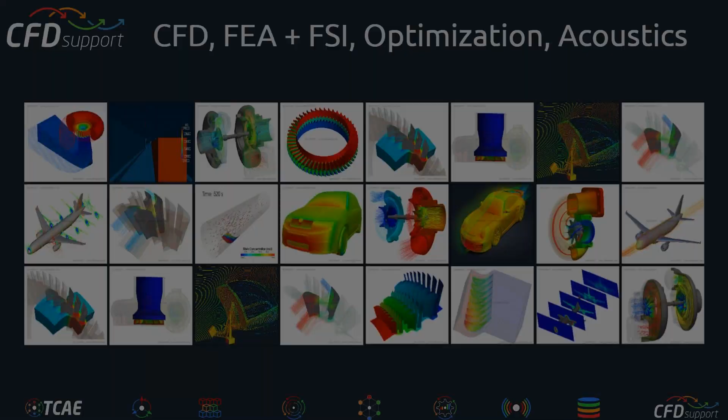So the software consists of several software modules. It's extremely flexible because it's been created from the beginning in a way to fit existing workflows or create new workflows from scratch. So every engineer from the industry can find their workflow. And so the workflow can be created. It's extremely flexible, and it can work.

Our software works with open source codes, with in-house codes, with other commercial codes, with everything that's available, because it's extremely flexible. From the beginning, we created it in this way.

That's one point. It has completely unlimited way of usage, so there are no limitations on number of users, job cores, or hardware installations, so you can be sure you can use your resources to the fullest. And there is definitely a really wide range of licensing and collaboration options. So in these terms, it's very, very efficient.

It's based on open source. This is really a big thing. We are a relatively small company, and we have acquired the ability to make the open source packages work together, to connect together, to create a comprehensive simulation environment. This is really important. So it works on OpenFOAM, ParaView, Calculix, NetGen, OpenVSP, and in fact, there's more than 60 open source projects connected together to create this software.

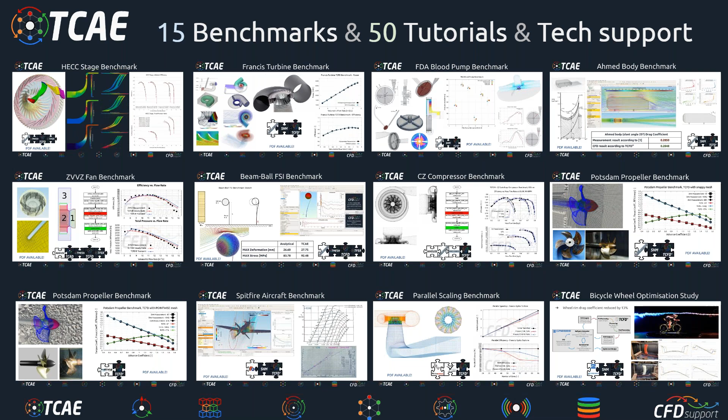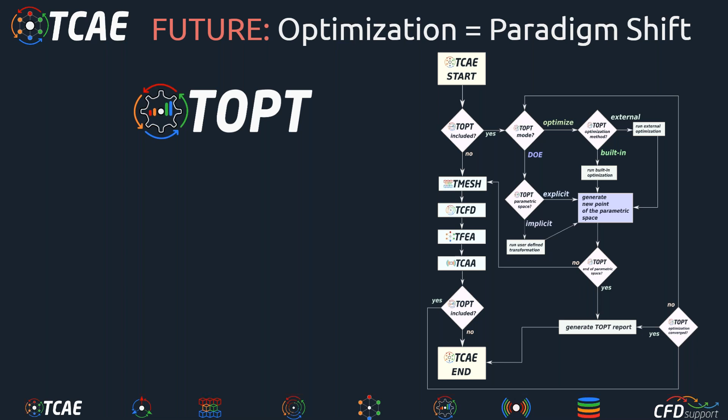Okay, so we have a couple of big projects for the future. We will definitely keep continuing development of the optimization module, which is called TOPT.

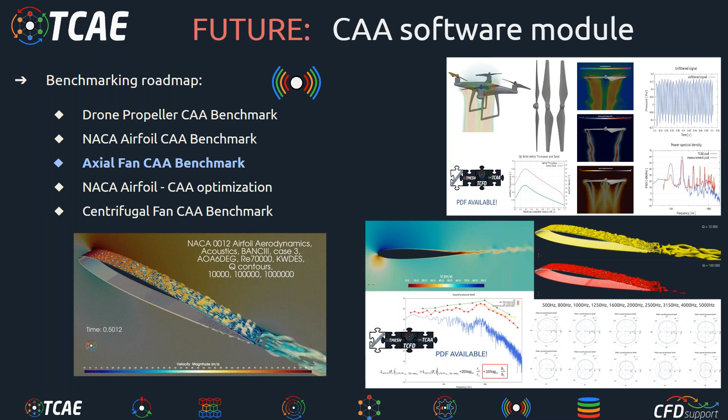So we will keep pushing TOPT. We have the acoustics module, which we believe is very unique, and it will be developed for the future for sure. We are also working on a new module called T-Base, which will allow users to save data for the future in special databases, because we believe data is the future because of machine learning, etc. T-Base will allow its users to create their own surrogate models, so to get simulation results in seconds because of prediction from a trained AI model. That's what we believe in, and we are moving here very quickly.

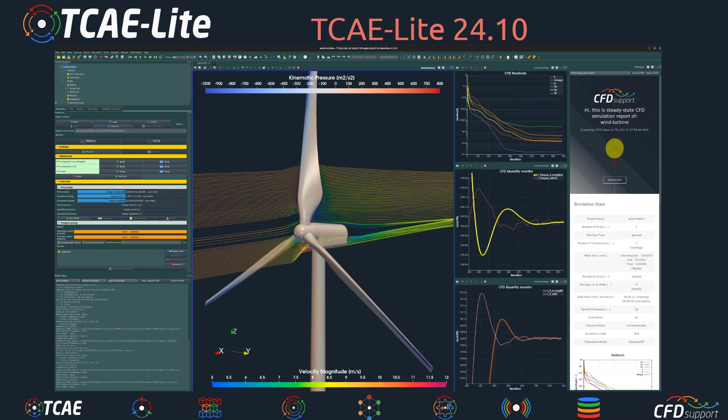Recently we released our latest version, 24.10, so there's a very new version out there, and we also have a light version for those with a limited budget. Today's webinar isn't exactly about this, but TCAE also has its light version, which is as cheap as a daily cup of coffee, so anyone who means it seriously with simulations can afford it.

That's TCAE Lite, and I'll kick off today's topic.

So when we talk about wind turbines, we mean horizontal axis wind turbines, because those are the really huge machines which are in quite a big trend in the recent period, because the energy harvested with wind turbines is renewable, considered green and very popular. It's trending, and the market is growing, and the need for simulation is growing very quickly, and that's why we're bringing this webinar. We are already helping several clients with wind turbines, and that's why today's webinar is here.

So we are talking about specific machines here, because they're huge, they are very large. You can imagine that nowadays the largest wind turbines are as large as the Eiffel Tower, really 300 meters high, with more than 100 meters long blades. I'm talking about offshore wind turbines. As you can imagine, the power grows with the size of the wind turbine, and the efficiency also grows with the height and size of the wind turbine. The disc covered by the blades is extremely important, the area is extremely important, and it can harvest more energy with bigger discs, and also offshore, where you can find much better conditions in terms of energy to get.

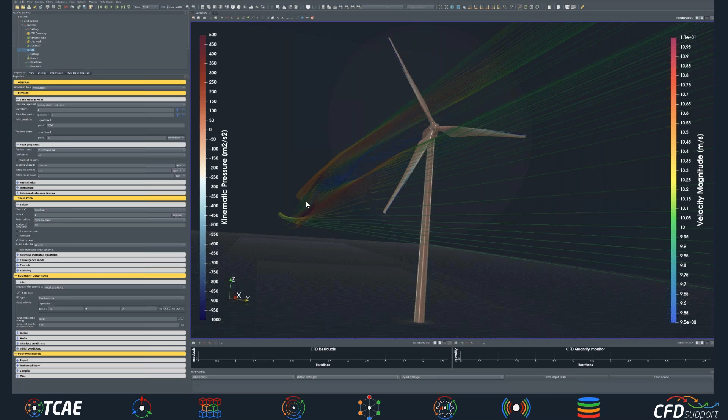So let's go to it. Here he comes, the one who comes after me. I'm not worthy to untie his sandals. And it's Radek. Yes, it's Radek. Let me take a look. Yeah, I'm switching over to him. The presentation has been switched. Yes, Radek, can you hear us? Perfect, can you see us? We can see, I hope you can see me now, and the stage is yours.

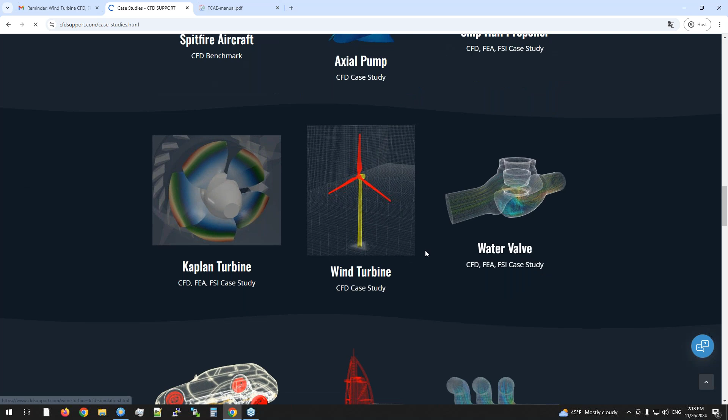Thank you, Luboš. I hope you can see my screen. I will show you an example of simulating a wind turbine in our software. First of all, as usual, I will start on our web pages. If you go to our web pages and visit the case study section, you will find examples to play with TCAE, and one of these examples is our today's topic, the wind turbine case. You can go here, download the case, and read some details about the case setup, the simulation, and the possible outputs.

Later on I will show you how this case is set up. Typically, I think it's not a typical CFD project case, because we usually focus on a single blade simulation, to follow all the necessary parameters with respect to good simulation results, like the boundary layer, mesh refinement, etc. So we typically focus on a single blade or just a section of the blade to improve it or to deeply analyze the properties at certain conditions. So this case is more or less a marketing case, and it shows the general abilities of our software to simulate such complex applications.

So today I'll show how to set up this kind of case, external aerodynamics of the whole wind turbine geometry, both with steady state and transient solver or transient simulation. So let's go for it.

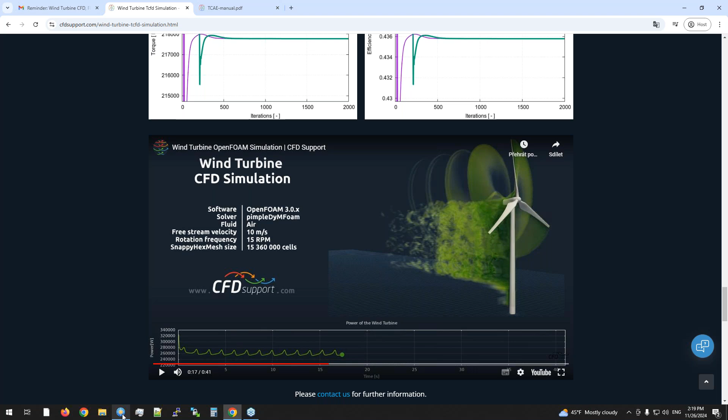So let me go to my computer, and I will run TCAE, the latest version, which was released almost a month ago. Time goes so fast. And I will take directly the case.

Let me create a new case here. You can create a new case when starting from the very beginning, but here I will use 'create from other projects,' so I will copy the setup of the project, which you can download directly on our web pages. Now I need to find it. I hope I placed it here, today's date, this wind turbine case.

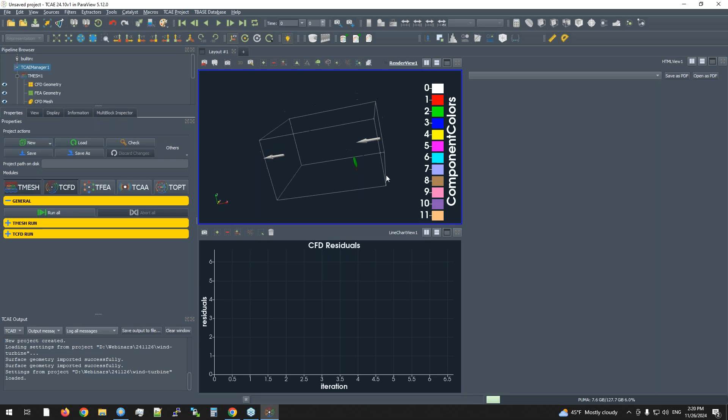So now I am creating a new project, and the data, the setup, is copied from the existing project because I had run it before our webinar started to have simulation data. Now I'm just creating a new project with the setup.

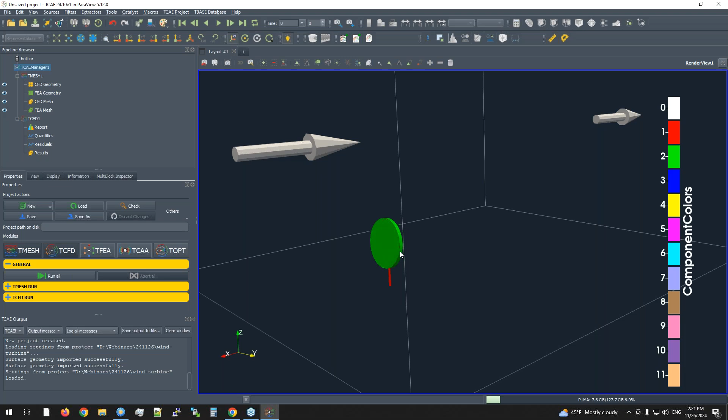As you can see, standard layout, and the geometry looks like this. We have the external geometry, using here the bounding box, and here we have our lollipop, which looks like a lollipop - that's the wind turbine - covered or surrounded by the interface, which defines the rotating region. So here we will have two regions: one rotating, and the rest, the bounding box, will build the stationary part. Basically this is what we need at the beginning.

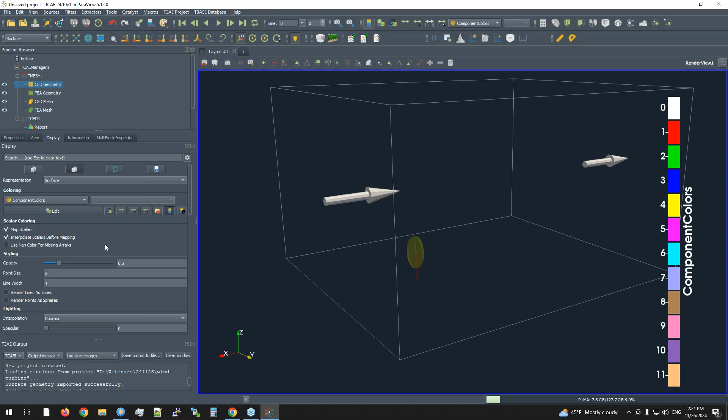Just to visualize the input geometry, I can click here on the CFD geometry and decrease or increase the opacity. Here we have basically the geometry of the blades, of the hub, and of the rest of the wind turbine geometry. So we can see that the rotating region, the interface, is built in this way.

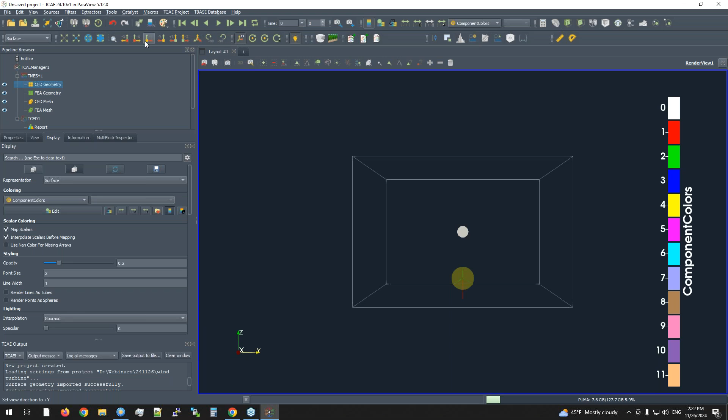Here in this particular geometry, if I give a proper view - yeah, the other one - you can see that the turbine is tilted a bit. The axis of the turbine doesn't go in the direction of the wind direction, so it's a little bit tilted.

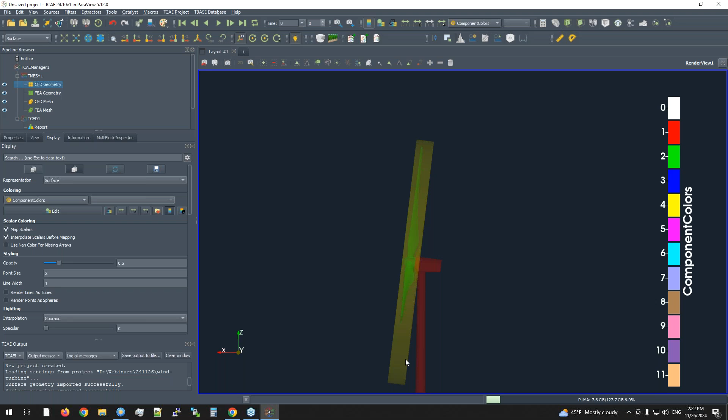So we need to account for that when we are setting up the rotation axis. Typically what you have at the beginning is just the STL geometry, the geometry of the blades of the turbine, and what you need to create is the interface. So for this kind of propeller simulation, you just need to create a proper cylinder which surrounds the virtual disk, the virtual rotating disk, of your wind turbine.

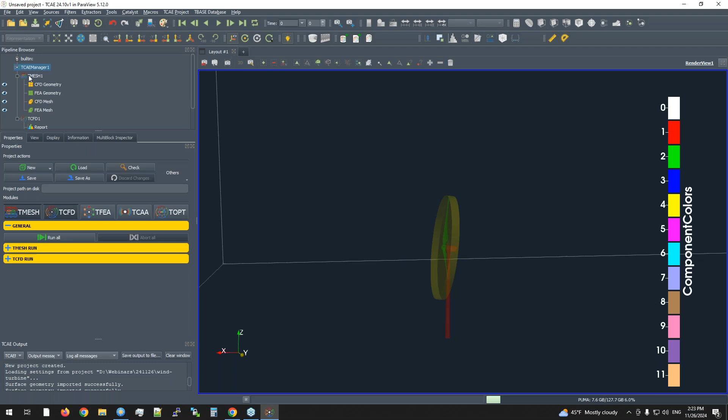So let's start introducing the case. First of all, what we need to create is the computational mesh, which is done in the TMESH module. In the general section, what we define are some general properties.

The most important one is the scale factor, which says the units of the STLs, because STL geometry itself doesn't hold any information about the units. So you need to know how your STLs were exported. In this case, the STL dimensions are in millimeters, so we need to tell it here.

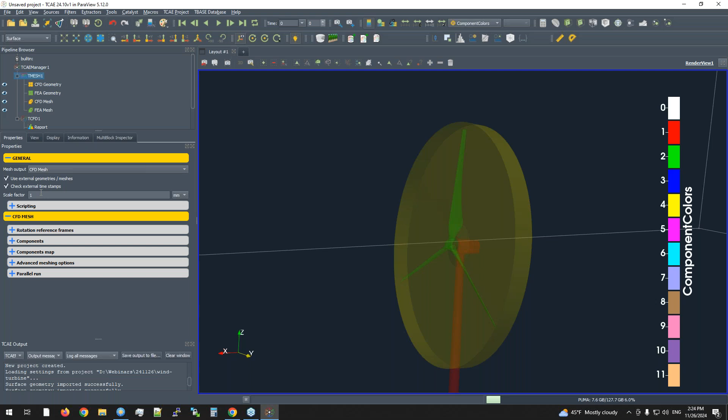And then basically it's all mesh output. If we go for the CFD simulation, we just need a CFD mesh. If we go for finite element analysis, or for both, we need to set the appropriate setup. Let's go for the CFD mesh.

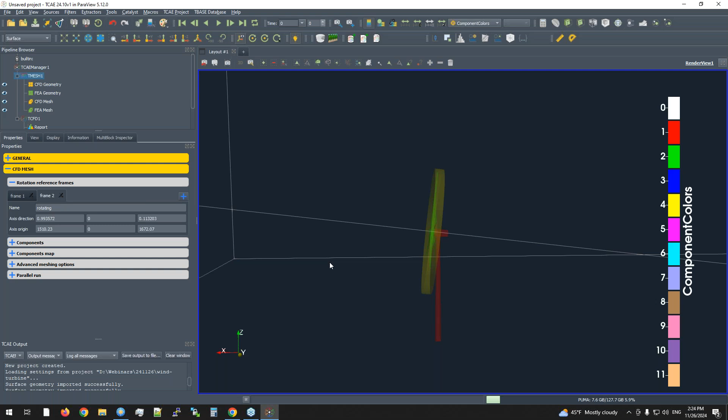First of all, we need to set the rotating frame. In case of our application, which is turbo machinery, something is rotating, so we need two frames: one static, one rotating. We need to set the appropriate parameters of the rotation, which consist of the rotation axis direction and the position on the axis, the point on the axis. So here we need to adjust it to properly define the rotation of this tilted rotor design. So we have two frames.

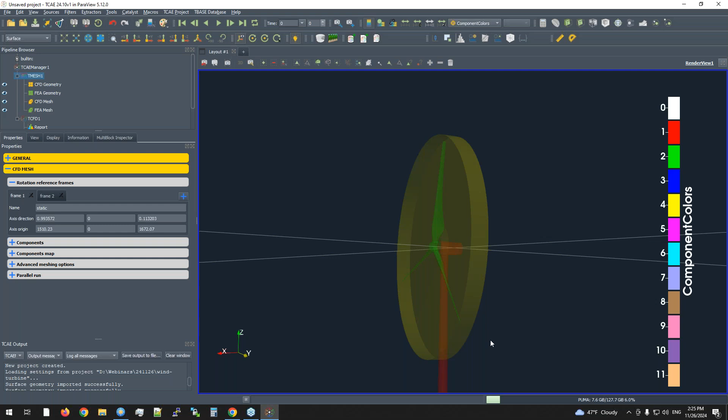Typically, the parameters of the axis are the same, because for some scenarios, mainly for segment geometry, when we would like to simulate just a segment of the wind turbine, and both the rotor part and stator part have segment geometry - a periodic segment - then we need to have this axis of rotation the same for the static part, because the solver or engine inside needs to know the transformation to properly connect the periodicities, etc.

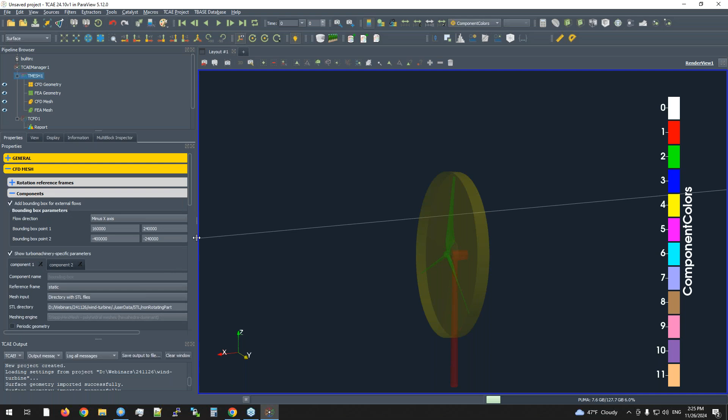So, rotation frames, and now we can go for the components where we set the main parameters for the meshing. First of all, for this kind of simulation, we can enable the add bounding box for external flows option, where we define the virtual box which creates our domain boundaries, flow domain boundaries. We just say the direction of the flow and the dimensions of our virtual tunnel shape.

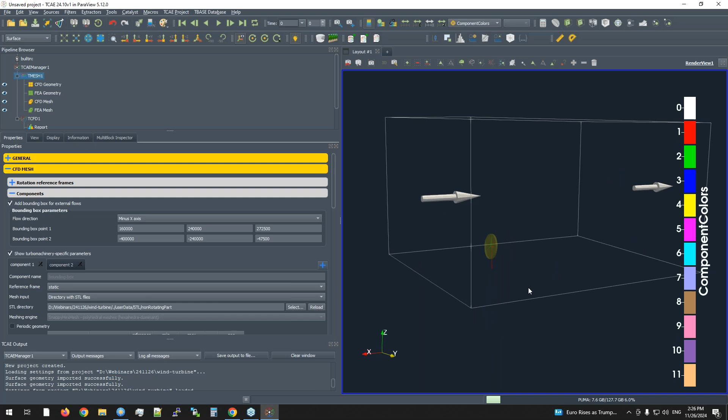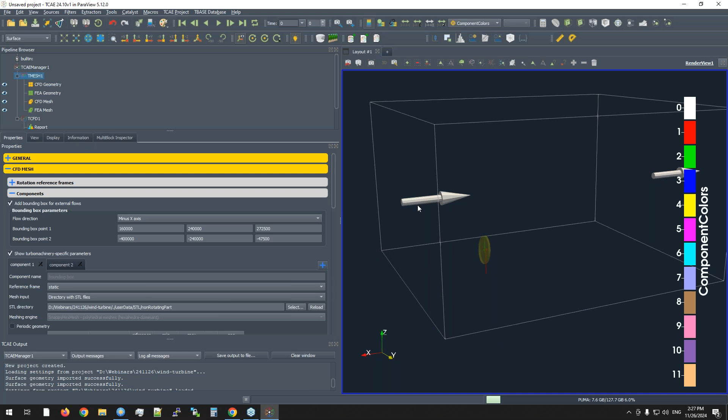You always need to keep in mind that for external flows, you need to create the domain big enough to get rid of the influence of the boundary conditions. I think we are now at the edge of the size of the bounding box, but typically it should be much larger to really be sure that the results will not be influenced by pressure interaction with the boundaries, etc. So you need to carefully choose the sizing, and here it follows that bigger is better.

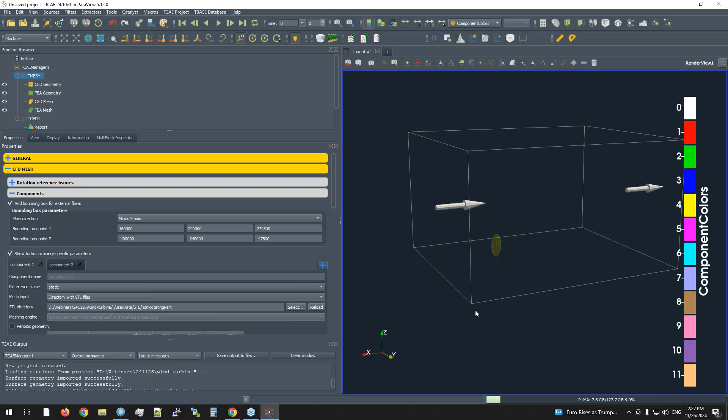Nevertheless, the bigger domain means some troubles for the meshing, because the background mesh cells should be large enough to even mesh the domain, and then use the refinement parameters on the important parts, mainly on the rotor and the other geometries which are analyzed, and refine it to a very high level compared to the big size of the cells far from your object.

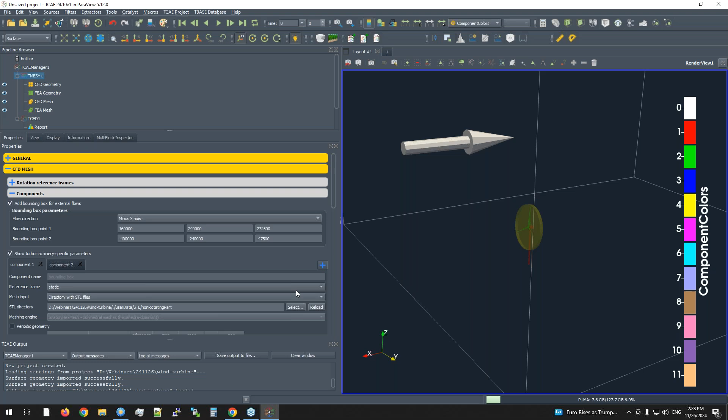Okay, so we have component 1, which will create the external part. Here we load it, we have two options. We can import the geometries, or we can just tell where the mesh tool can find the STL data. So this is the second option - we use external data, which is not imported directly into the project.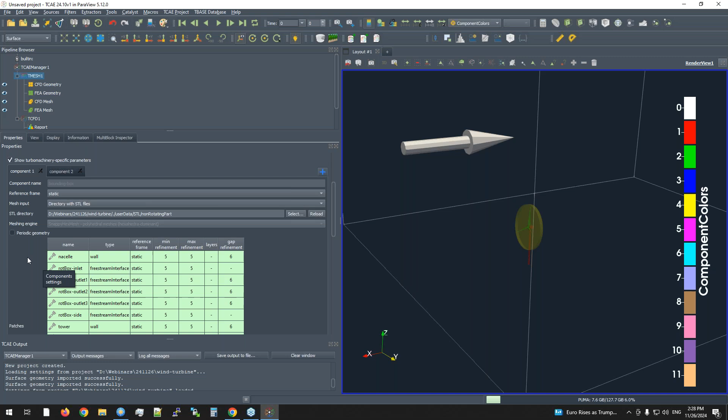This scenario is typically good when you would like to, for example, do some optimization steps - adjust, improve, or modify your geometry designs, which can be regenerated by the external tool placed in the directory. For the next run, when you reload the case, the new geometry is loaded, and you can run the whole workflow again with one click with a new set of geometries.

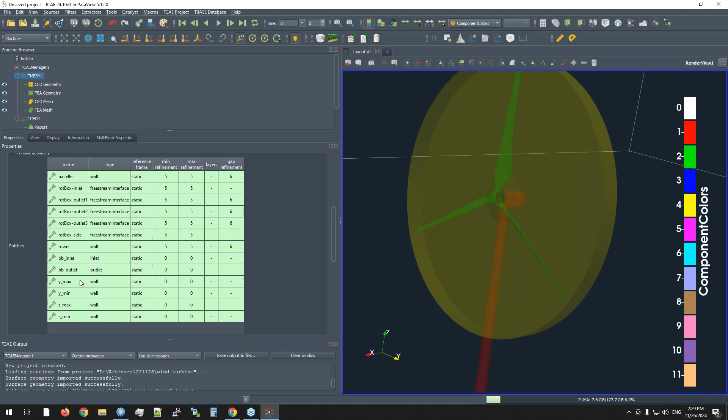Here is the table with all the STLs loaded or activated for the geometry. So what we have here: we have the rotor box part, the parts of the rotating interface, which is set as a free interface type, free stream interface type. Then we have the other parts, the housing for the wind turbine compartment, and of course the tower part.

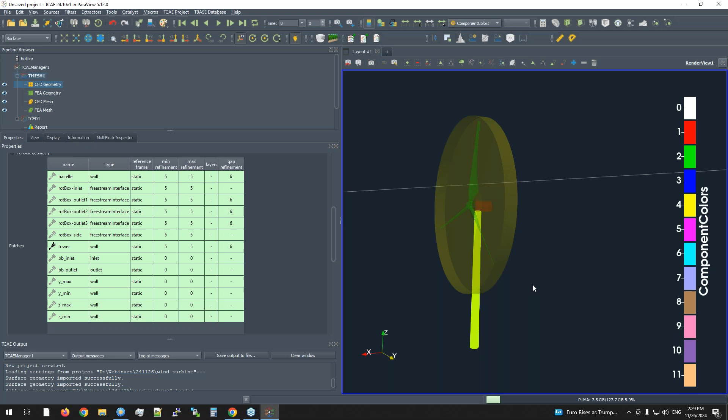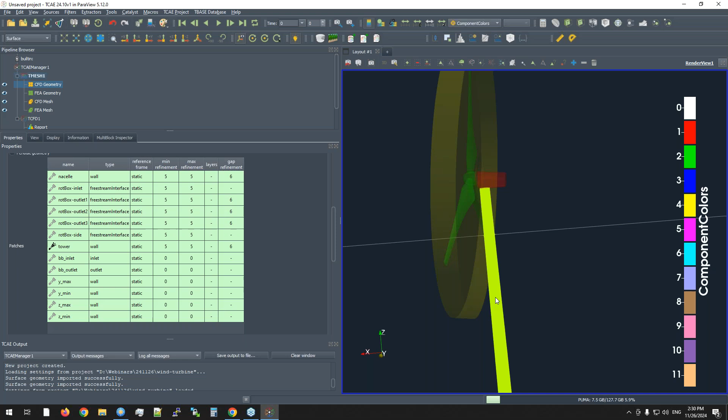Because it's a static part, we need the domain to be rotationally symmetrical for the given rotation transformation. So the interface is created in a way that it doesn't cut off the tower in any part. This is important because when you want to do the real rotation, solid body motion, you really need to have a symmetrical part, and you don't need to include any static part into the domain which is not symmetrical with respect to the rotational transformation.

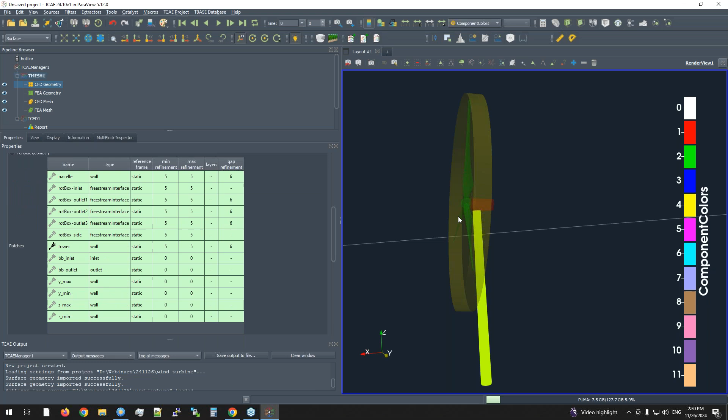Okay, so the rest of the geometries is the built-in part, which was added by this add bounding box - so we have the inlet, outlet, and the other sides of the bounding box.

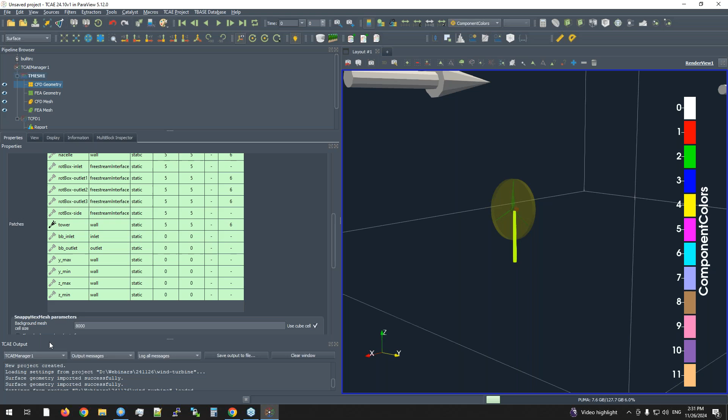All right, so here we have the minimum and maximum refinement level. If I go a little bit lower, here we have the background mesh cell size, which is the largest cell in the domain. With respect to this sizing, we are setting the refinement. For example, level 5 means that cells intersected by the given geometry part will be refined, which basically means split up to level 5 - so 5 splittings of the hexahedra will be done at the given part.

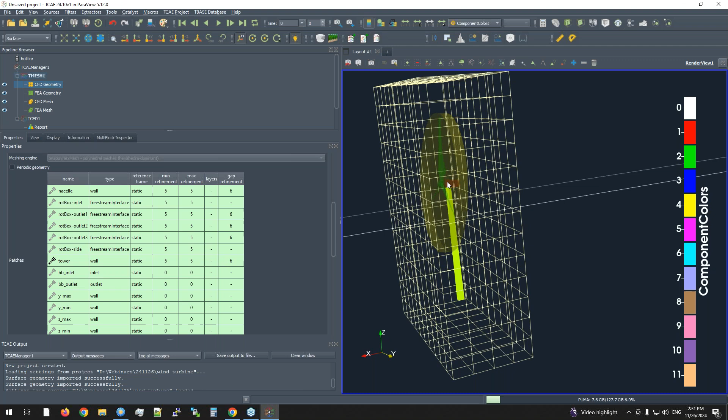In this way, you refine the mesh with respect to the surface, and for every surface of the wall type, the rigid wall, you can create the gap refinement - or basically it holds for any patch. This is done to properly mesh the tiny parts on the interface between the housing of the turbine and other parts, to really be able to mesh these small gaps in the geometry domain. So we don't need to set a high level for all parts, but just increase the refinement locally for the parts which are too close together.

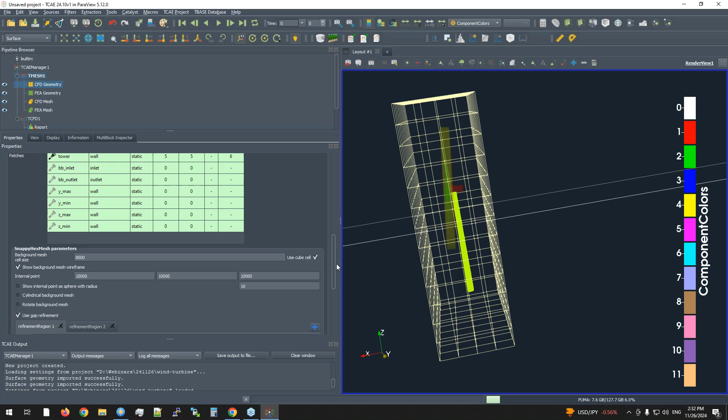Okay, so this is the show background mesh wireframe and the sizing of the background mesh. Here we have the internal point by which you define which part of the domain will be meshed. I think this is clear. And here we have the refinement region.

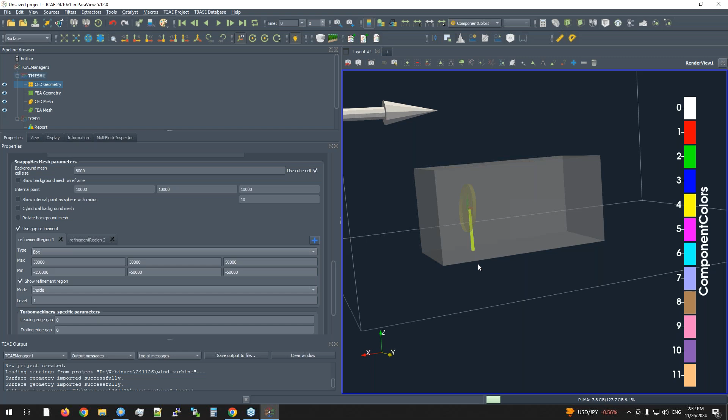Typically for external flow applications, you would like to refine the mesh more in the neighborhood or wake area of your geometry, and keep large cells apart from your geometry, because you need to optimize the cell count with respect to the simulation time. You need to optimize always, because time is so precious, and you need to really go for optimizing the simulation also from a cost-effectiveness point of view.

You can add as many refinement regions as you want. Typically, there is gradual refinement, with a high level of refinement near your geometry, and larger refinement for the wake, to resolve the flow patterns further from your geometry, which doesn't directly affect integral values like efficiency. So you can gradually refine the mesh with different sizing for these refinement regions.

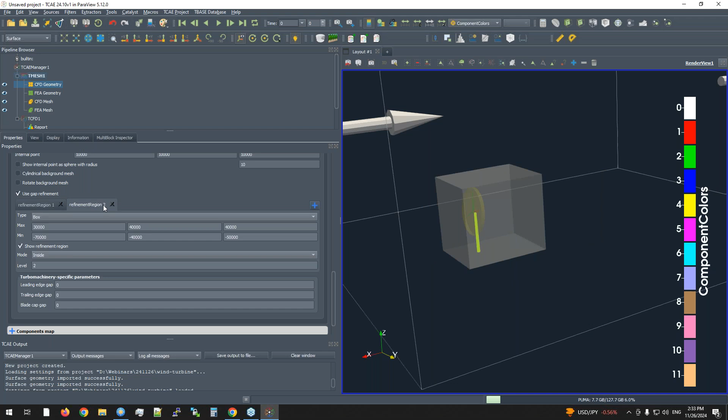So this was the external part, and here we have the internal component. Here we have the STLs for the blade. Each blade has its own STL, and additionally the blade is split into several parts, like suction parts and pressure parts. Anytime you click here, you will see the parameters or shape of the given patch. And for the blade types, you assign the proper types, like wall, or specific names for turbo machinery which directly correspond to the given part of the turbo machinery design.

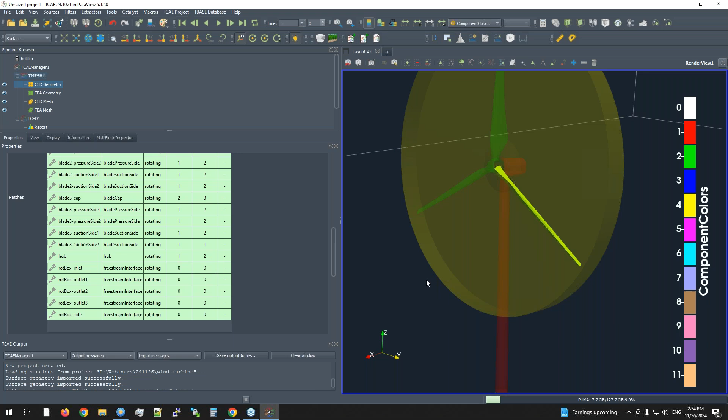Again, same as for component one. For the static part, we have the freestream interface, which corresponds directly to the outside interfaces from the stationary component. For the rotating parts, because we have a rotating component, we need to set the reference frame as rotating, and all walls which are physically rotating, basically all walls within the rotational component, need to be set as rotating.

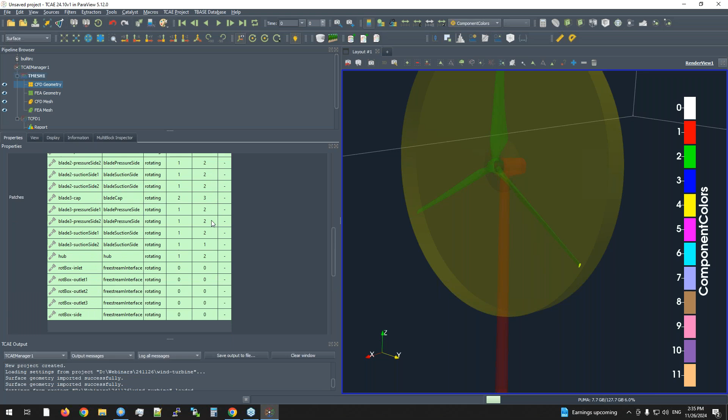Here, because we are inside this rotating region, and this region is much smaller compared to the bounding box, we drastically decrease the sizing of the background mesh, because we need to refine this part much more compared to the general refinement of the stationary part.

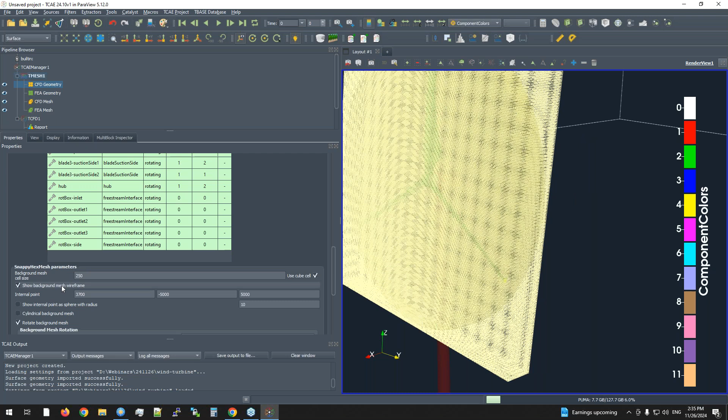So we set much lower sizing for these cells, and therefore we don't need to set so much higher refinement level for the blades. Here we have, for example, up to level 1 or 2, and if we have different numbers for the minimum and maximum refinement level, it means the flat parts are refined with a lower level, while highly curved parts, like the pressure side, will be meshed with an additional level.

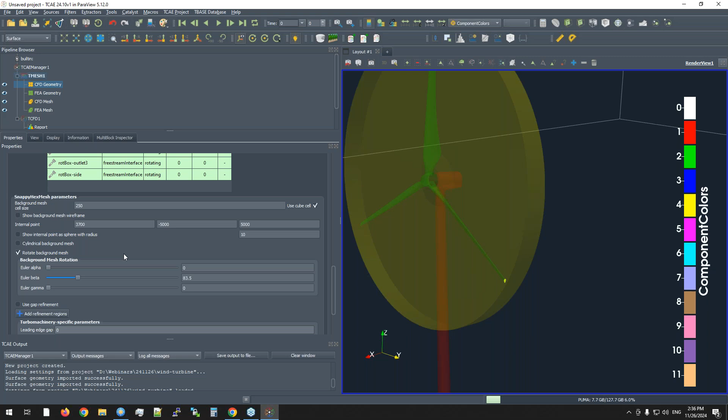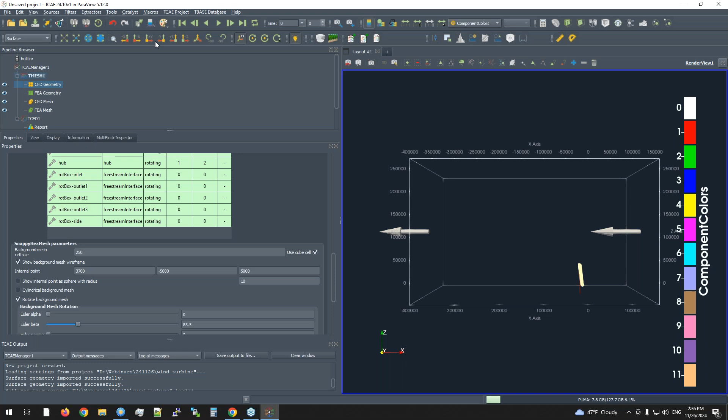For better mesh alignment, let me show you. We can also adjust the layout of the background mesh with a tilted rotor. When I change the view so it's perpendicular to the flow direction and zoom in, we get a nicely aligned background mesh with the interfaces and with the blades themselves, creating a much nicer mesh compared to the standard 0 level setting.

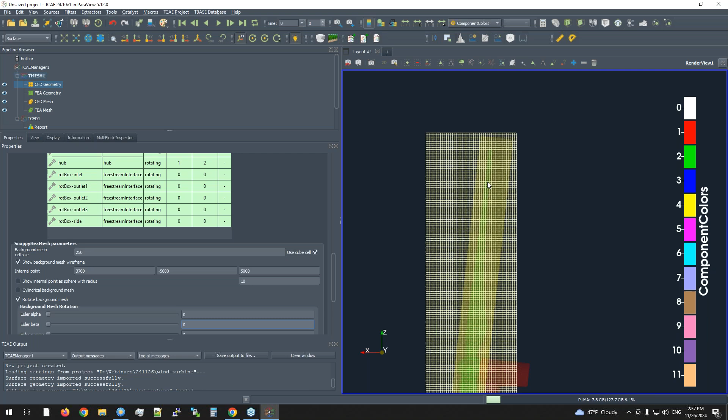You can see that the cells are not so nicely aligned with the interface otherwise. So this small adjustment can also improve the meshing. This is the example of the rotate background mesh option, and with this scenario, I think we are fine as the example.

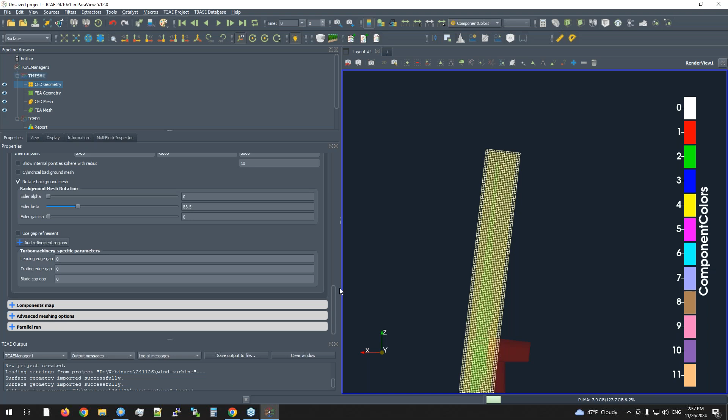Of course, for more detail and more accurate analysis, we can add boundary layers. The boundary layer is simply added by adding the numbers to the given patch to which it should be added. Then for more details about the mesh parameters, particularly the layer parameters, we can go to the layer mesh parameters, and also play with the local properties of the boundary layer.

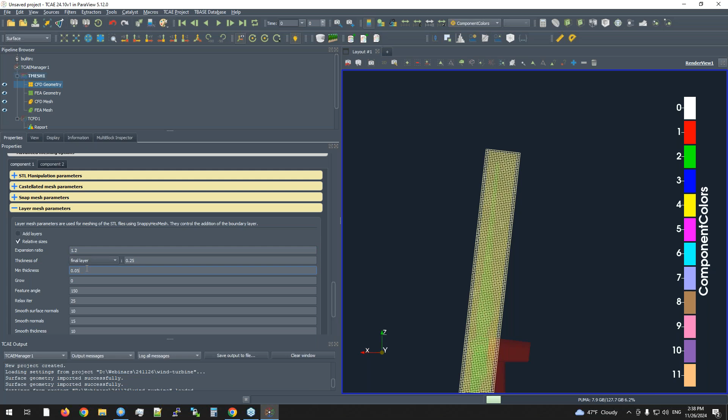We can set the overall thickness, the expansion ratio, some kind of minimum thickness, but it can stay at these values, and some other parameters which can influence the layer adding algorithm and procedure.

The last parameter is the number of processors you can use. On my computer, I have 10 processors available, so I can save my setup.

Not save as, sorry, I would like to just save it. Basically not save as, because I haven't yet saved it. So I will create wind turbine, for example, webinar. Now I am lucky that I didn't make any wrong steps. So typically I suggest to periodically save the project, so you don't lose so many steps you've done before your save.

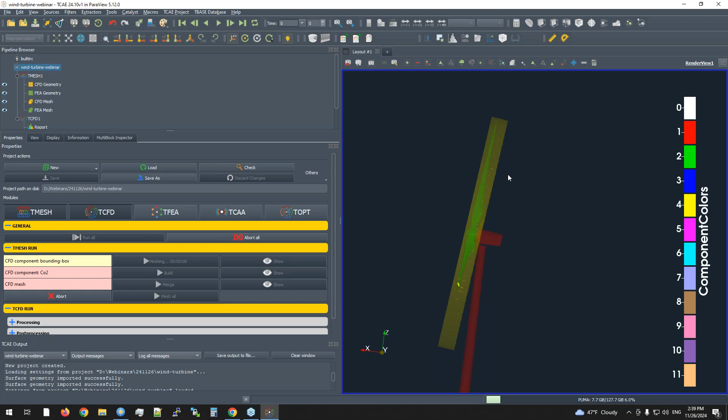Now let me run the meshing. You can run the meshing whenever your mesh parameters are set. Meanwhile, because it will take some time to mesh the whole region, it will start step by step. First it starts meshing the external domain, and then it goes to the internal domain. Meanwhile, I will go further with setting up the CFD simulation.

Here, in general, we have the simulation type. So we are going for the wind turbine. We have a specific type for the wind turbine, because all the turbomachinery applications have different methodologies for how to evaluate efficiency, which is not the same for wind turbines. Therefore, wind turbine is a standalone simulation type.

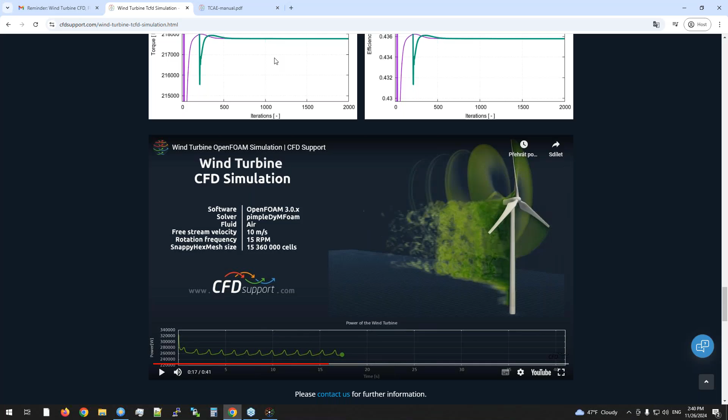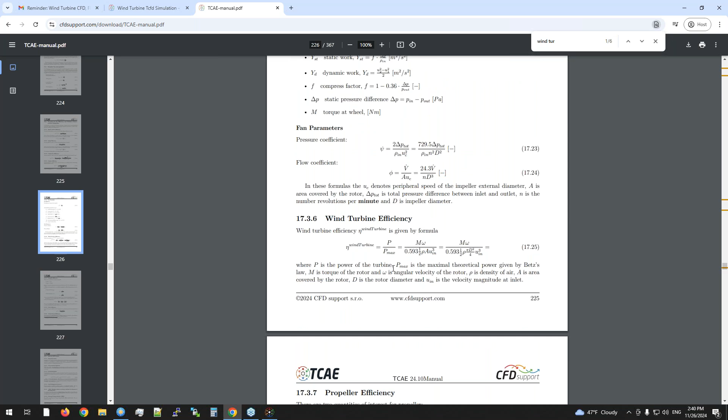For example, if you go to our web pages and documentation section, resources documentation, you will find the TCAE manual, and you will find the efficiency formula, not for propeller but for wind turbine. It has a specific formula which compares the real evaluated power of a turbine with respect to the maximum theoretical power of the turbine. This formula is used, so this type has to be set explicitly to get a proper efficiency, besides other wind turbine specific parameters.

Let's go step by step. In the physics section, we can set the time management, which means we can tell if we would like to simulate a steady state simulation, transient, or both. Here we use the combination of these two.

So it works like that: first the steady state simulation is run, and when time management is set as steady state plus transient, the transient is initialized by the result of the steady state simulation. This helps the convergence for the transient solver, and we typically suggest to start for the turbomachinery application like this, starting with the steady state simulation and then going for transient simulation.

As an example, we said the transient time will correspond to 4 revolutions of the impeller, of the rotor. In the fluid section, you choose if your physical model should be incompressible or compressible. Here, for ease of simulation and to speed things up, we can go for the simpler incompressible model, and here you set your parameters of the fluid, typically air.

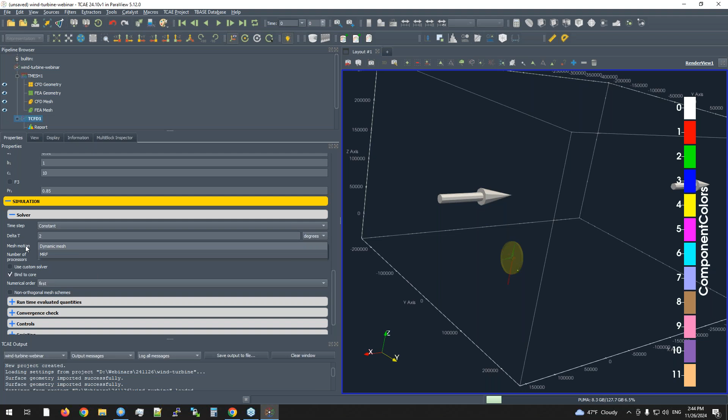Mesh motion is dynamic, so for transient simulation, the rotor will be physically rotating, as we've seen in the animation at the beginning of my part.

Here you can choose the numerical order. Typically, when you start with the simulation, you go for first order, and when you're okay with the setup and the convergence is smooth, you can go for second order for higher accuracy.

Runtime evaluated quantities: here is the section where you define what results and what kind of results you would like to see. Averaging window stands for averaging the solution, both for transient and steady state.

So averaging window is for the steady state, and transient window is for averaging of the transient simulation. Typical transient window is proportional to the revolutions. Typically 1 or 2 revolutions is fine to get a nice constant average solution, because we would like to have a single value at the end.

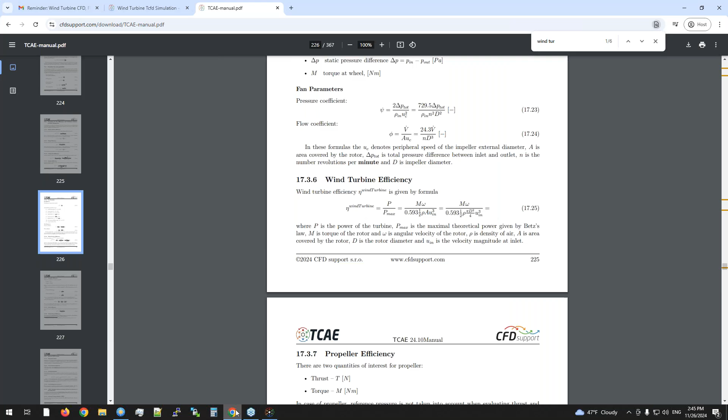But as we have seen here, the solution is changing over time. So for example, to evaluate the average power, you need to have nice averaging. Typically averaging of 2 revolutions is enough to have a nice constant averaged power value.

Maybe we can show it later on in the HTML report. You can ask, for example, for fancy visualization like we saw here, to evaluate vorticity or Q criterion. You can enable it here.

Then the efficiency section: basically you define from which patches the torque is evaluated and what are the inlet and outlet patches. But here, mainly the most important part are the torque patches. You can also set additional forces and probes.

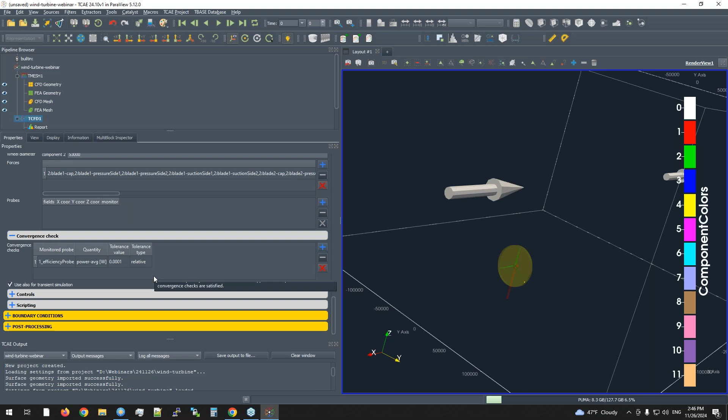And when we continue, convergence check. Sometimes it's clever to stop the simulation before the maximum iterations are reached. So you can go for the averaging, and choose the quantity by which you would like to set your stopping criterion. For example, here is the average power, and if the relative tolerance is less than this value, the simulation can be stopped before the maximum iterations are reached.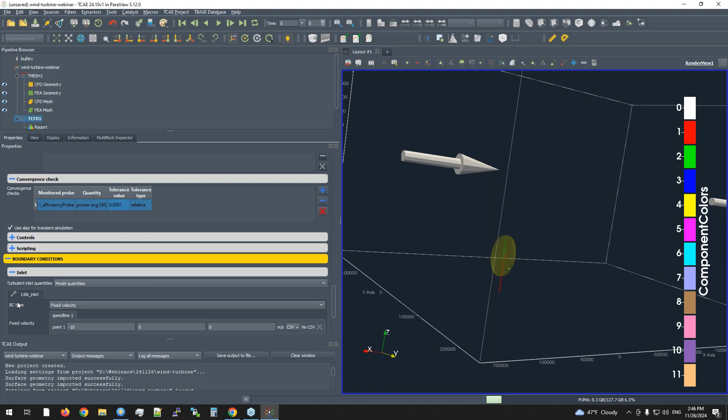And finally, boundary conditions. Here we set the speed of the wind. At the outlet, we have a standard fixed reference pressure, which is 0, because our reference pressure is set as atmospheric pressure. For the walls, we are setting standard boundary conditions. With this resolution, we use standard wall functions, and initial conditions typically correspond to the speed of the wind and the ambient or reference pressure at the outlet.

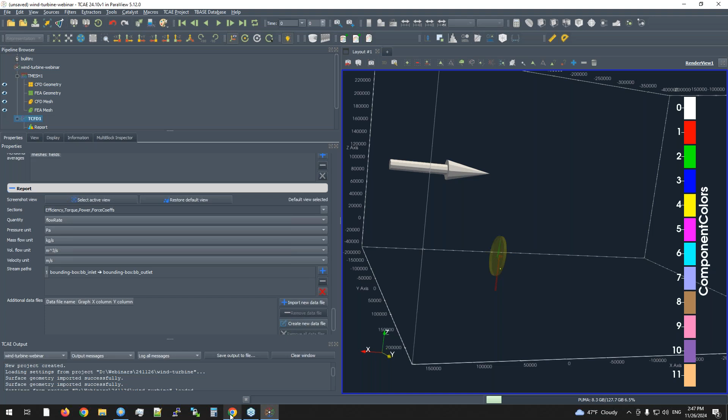Maybe to conclude this setup part, you can adjust your report, so you can set which parts you would like to see in the report, and the units which will be visualized. At the end of the simulation, you can evaluate the HTML report, which can also be found within your project in the CFD module, which holds the CFD simulation.

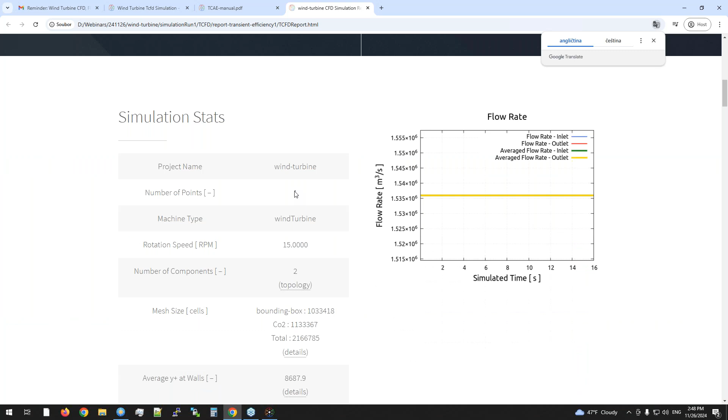And here you have the reports both for steady and transient. I will go for the transient report. Here basically you have a nice overview of your simulation with all the details of the setup, the mesh, and how long it took.

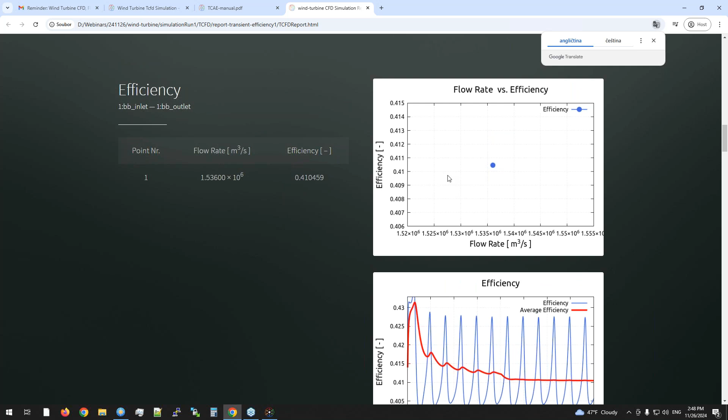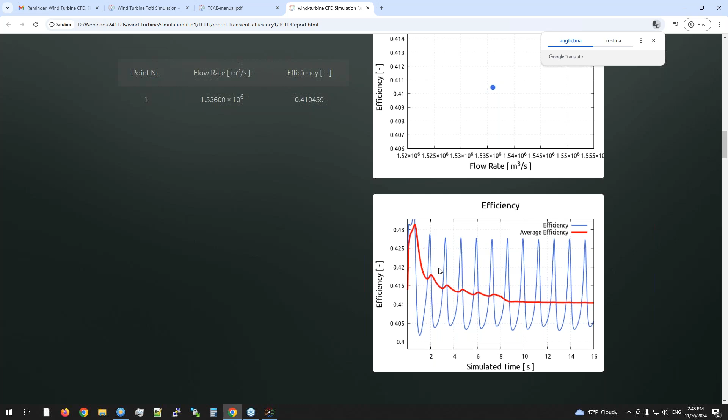Here, for example, you can see the efficiency, the final average efficiency point, and you can see the values throughout your simulation. The blue line is the instant values, and the red one is the averaged value, averaged over the last 2 revolutions. So you can see that the efficiency is nicely converged and constant.

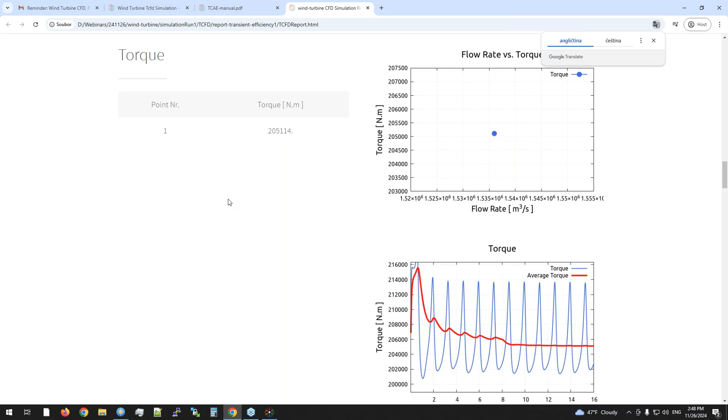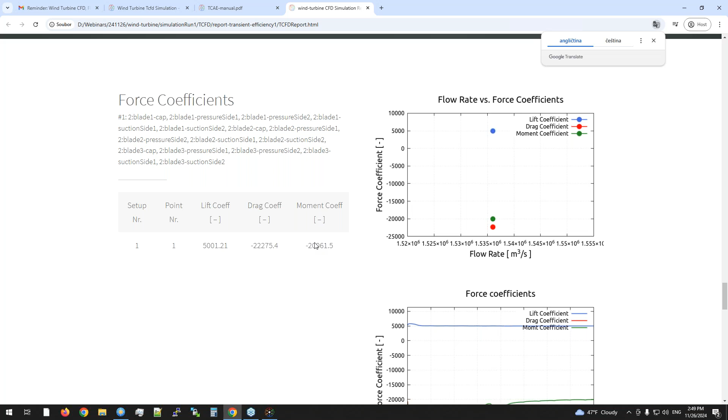The other quantity you would like to follow is the torque, again the instant and averaged one with the final value, and the same holds for the axial and radial forces, and finally the computed power. If the force coefficients are enabled, you can also follow some coefficients and the forces acting on the given part of the geometry, and the same holds for the torques.

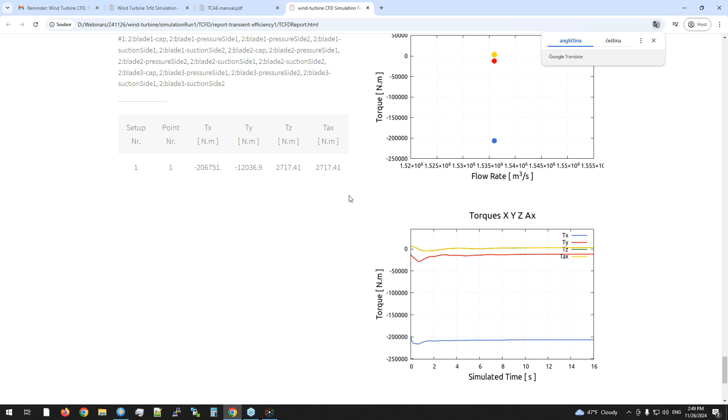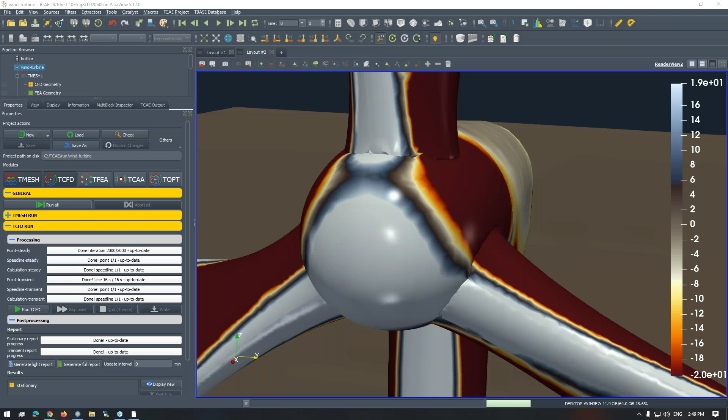Okay, so maybe I see Lubos is back online, so maybe it's time to go back to Lubos to conclude, and we can show some additional information later during the Q&A. So from my side, it's all until now, and I think it's time to go back to Lubos. Indeed, Radek, thank you very much for your part and contribution. As usual, it was great and very technically precise, and we've seen what we wanted to see. Thank you for it.

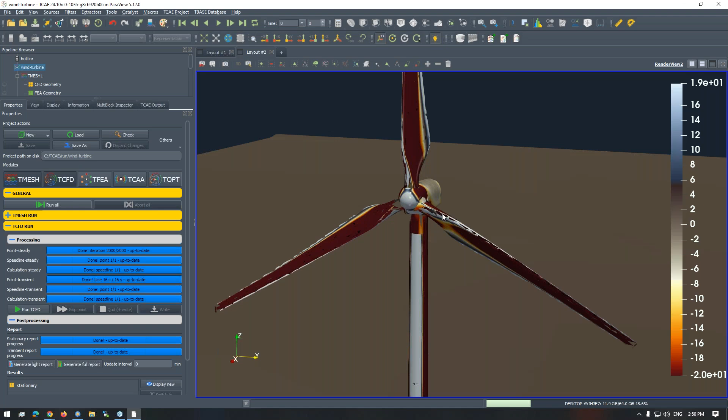Thank you for everything. I was playing in the meantime with the case you showed, and I definitely like it. It's quite comprehensive. There's of course a lot of things we could share about wind turbines, but time is running, so let's focus on the Q&A session.

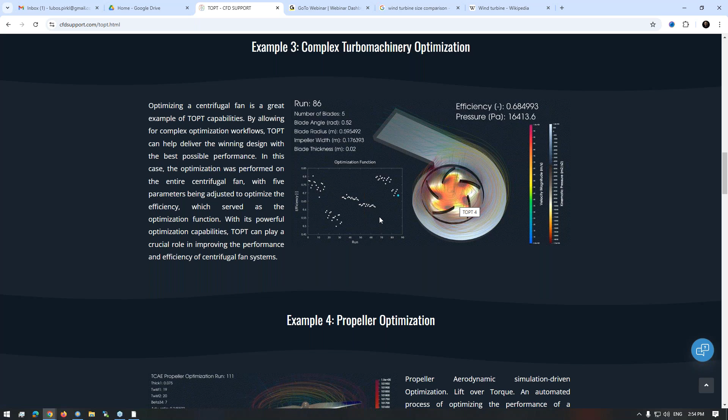Yes, so if I understand, it would deserve more detailed debate and talks, because we can do quite a lot in terms of, like Radek mentioned, several simulations and scenarios with geometry changes. But during the simulation, for one simulation point with one set of boundary conditions, it's relatively difficult, for good reasons - it's possible in theory, but those are extremely challenging and demanding on CPU power. These are really big simulations. For that reason, this kind of optimization work can do a better job, we believe, but as I said, it deserves much more detailed discussion, and we are ready to undergo it. So Thomas, feel free to come back with this.

Okay, the next question. Saroy is asking, thank you for the webinar - can this be solved with conjugate heat transfer? I would say yes, conjugate heat transfer is to some level included in TCAE, but again it would deserve a proper discussion of what and where is shared, and what boundary conditions and physics is included and what not. So in general we can couple it with the FEA part, so we can do a CFD simulation with TCFD.

With TFEA we do the conjugate heat transfer in the solid, and then these two models can be iteratively connected by updating the temperatures from the results of the FEA, and we can map it back to the CFD to run another iteration, then map the resulting temperatures back on the solid part. So some of these applications we can also handle with the workflow itself, where we include both CFD mesh and TFEA. Yes, there are certainly quite a lot of options. It would depend on what's the goal and what physics is still important, but in general it's possible.